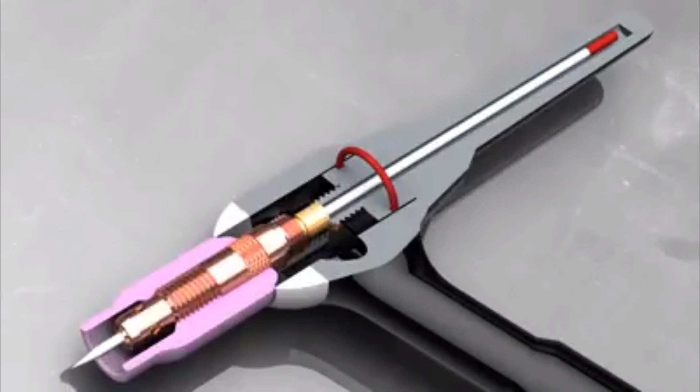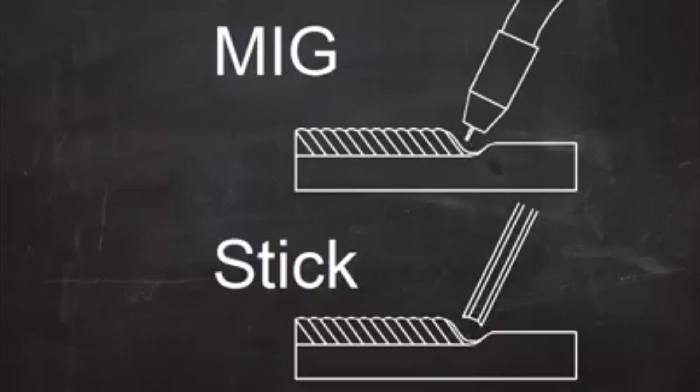This is a tungsten electrode, and tungsten has an extremely high melting point. When you TIG weld, the electrode gets hot, but it doesn't melt. We say that it's a non-consumable electrode. That doesn't mean it lasts forever. That just means that it doesn't melt and become part of the weld. You see, in a lot of other welding processes, the electrode melts and becomes filler metal. Those are consumable electrode processes.

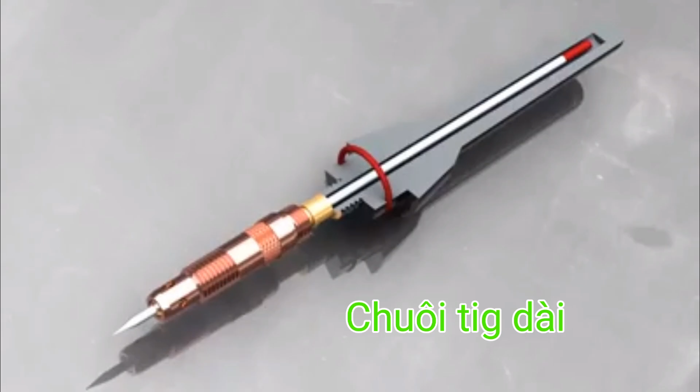So here's the tungsten electrode being held in a TIG torch. The electrode slips into a collet, and the collet tightens up against the collet body. You can adjust the length that the electrode sticks out of the holder by loosening up the end cap. When you tighten the end cap, the collet clamps down on the electrode.

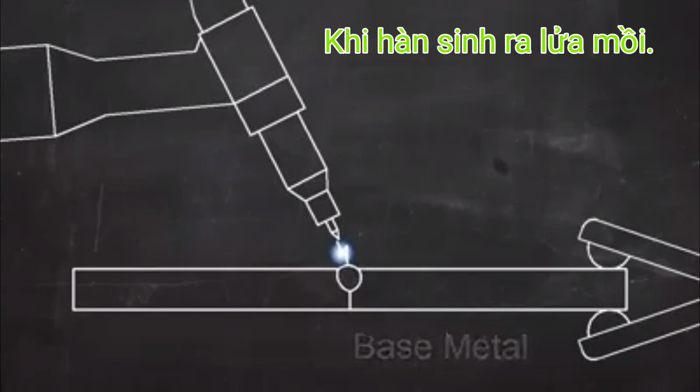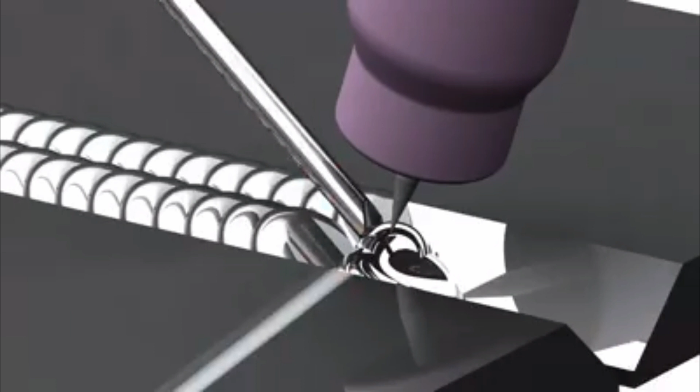TIG works by melting the base metal, and that is the metal that makes up the two pieces that are to be joined. The heat is generated by an electric arc that forms between the base metal and the tungsten electrode. You can control the amount of heat with a foot pedal, and weld with or without filler metal, and that's not a choice you have in a lot of other processes.

If you want to add filler metal to a TIG weld, use a filler rod, which is just a rod of metal with a specific alloy. You want to make sure that the filler metal you're using is compatible with the base metal and that it has the strength required to do the job.

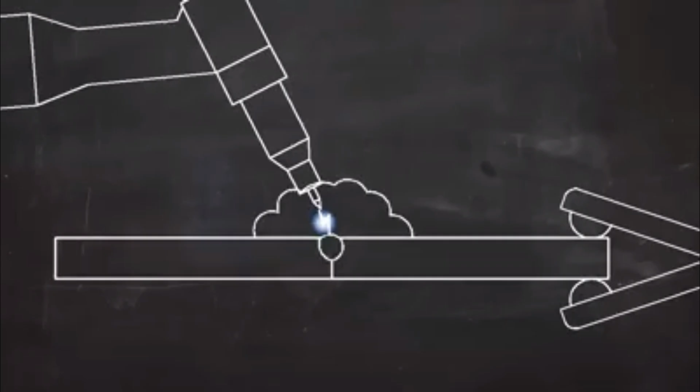In TIG welding, the molten metal is protected by a shielding gas. This gas, usually argon and sometimes helium or other gases, keeps the molten metal from reacting with oxygen and water vapor in the atmosphere. This shielding gas is stored in high-pressure cylinders like these. The pressure is reduced to a usable level by a device called a regulator. The shielding gas flows through a hose and comes out right at the point of the weld.

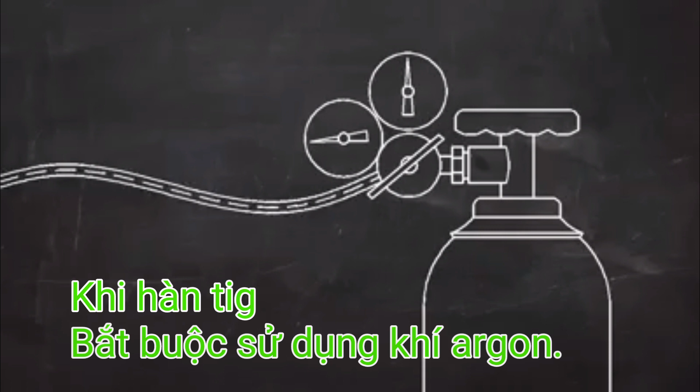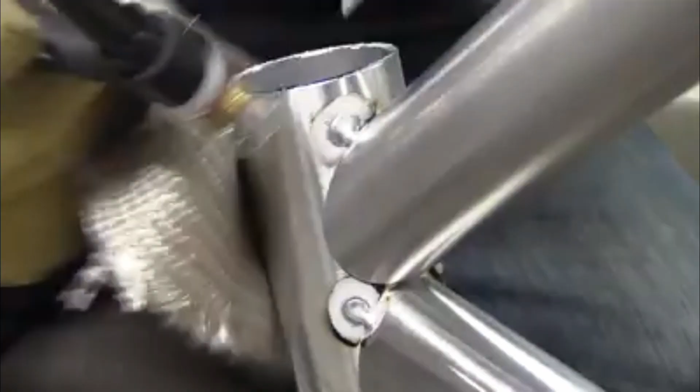All right, pay attention to something right here. It's subtle, but I'm going to call attention to it. Mike pulses with the foot pedal, and the reason for that is constantly having to rotate the torch to keep a decent torch angle. And so while he lets off, that gives him a second to reposition, rotate his wrist, get a favorable angle. That way the torch is never leaning back too far.

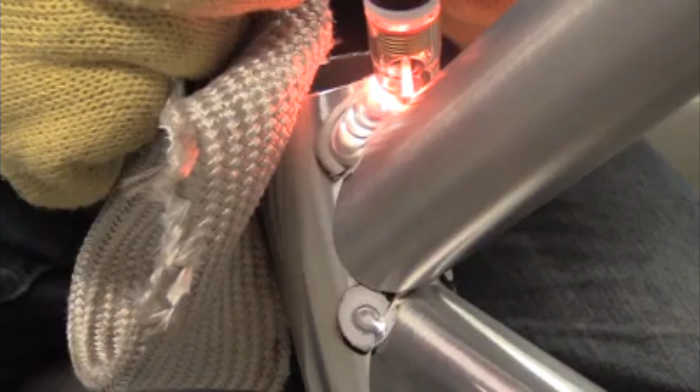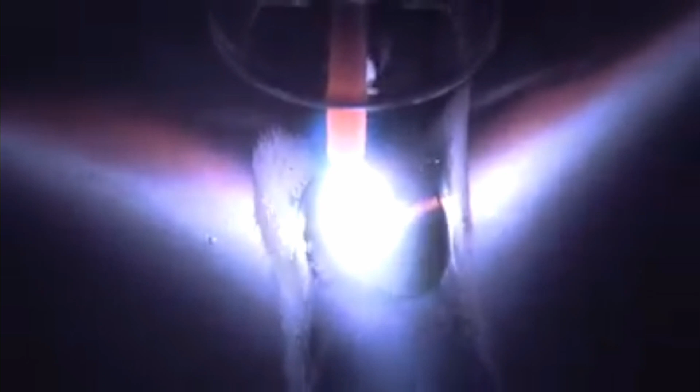So it's positioned in a fixture for welding after it's all tack welded up in the lineup fixture. So this is a mock-up right here, just positioned in that fixture. We're not going to weld the whole bike, just the head tube here. I think that's what it's called. Just the pulsing with the pedal here a little bit if you pay attention. There'll be plenty of arc shots coming up, and we will go over the exact settings used at the end of the video, where we sit down and talk about all those kind of things.

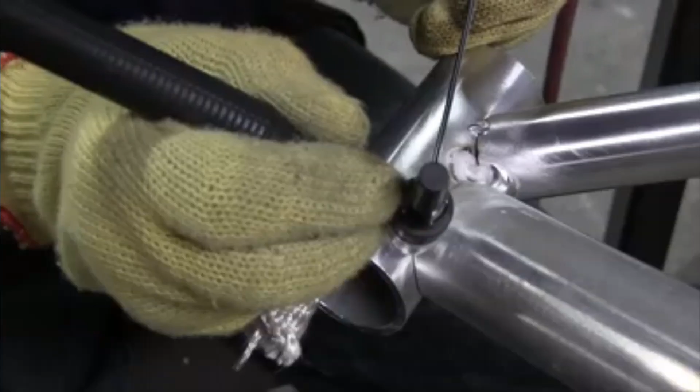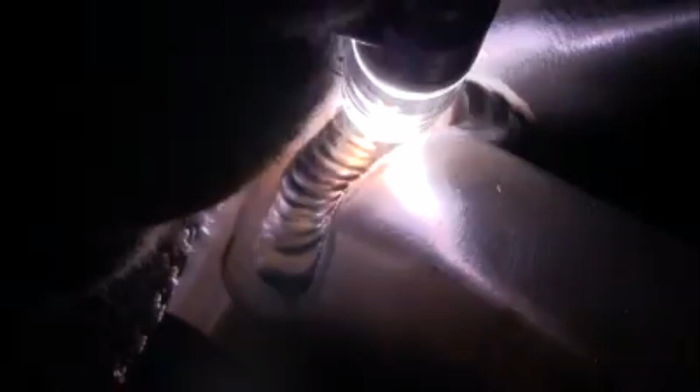Using a number 8 Furick Pro here, mainly two reasons. Number one, it's a really good cup. It helps you see where you're going, but also it's really nice for filming. It really kind of lights the whole way, so you can not only just see the puddle, but we can see the seam. We can see a few ripples behind it and everything. But I wouldn't hesitate to use this particular cup for this application anyway, because it just works good.

Again, the pedal pulsing, he's not letting off a whole lot, just enough so that heat doesn't build up and get out of hand while he's repositioning the torch angle.

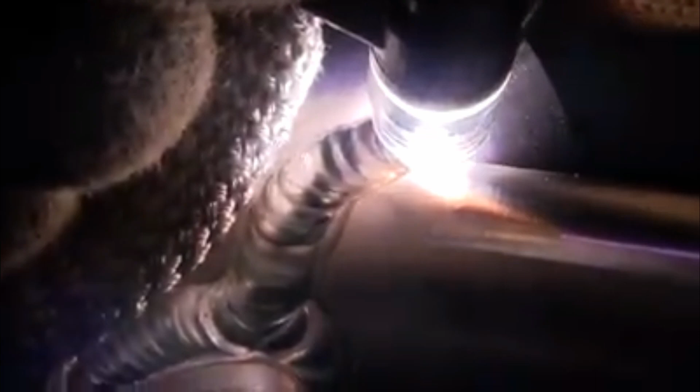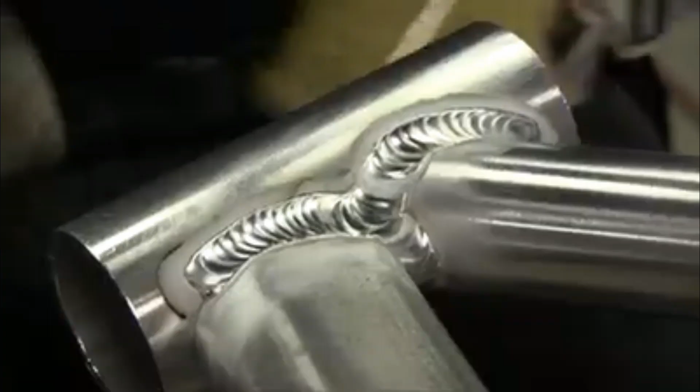A lot of guys in motorsports, and this is very similar to motorsports applications like roll cages and chassis and things like that, a lot of those guys pulse with the pedal, and the reason they do it with the pedal is because if they get hung up a little bit, if their glove hangs on something, or they just can't quite get positioned, that pulse isn't coming automatically. It only comes when they want it to come. So it's a very popular technique. I think it's a good technique for these type applications.

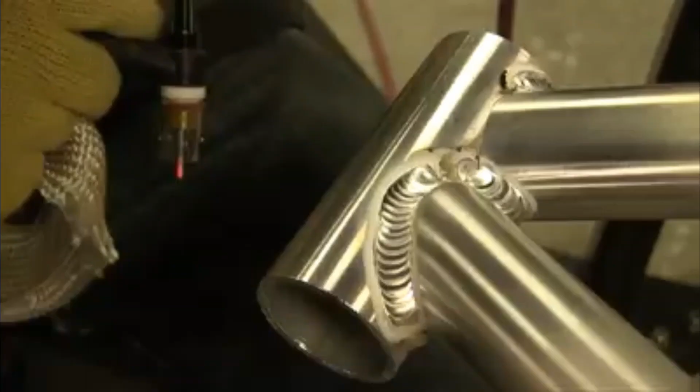Here's a good shot of it. You can see sometimes, when you get a bad angle, you can actually sort of look through the cup and see where you're going to feed wire. That's another benefit.

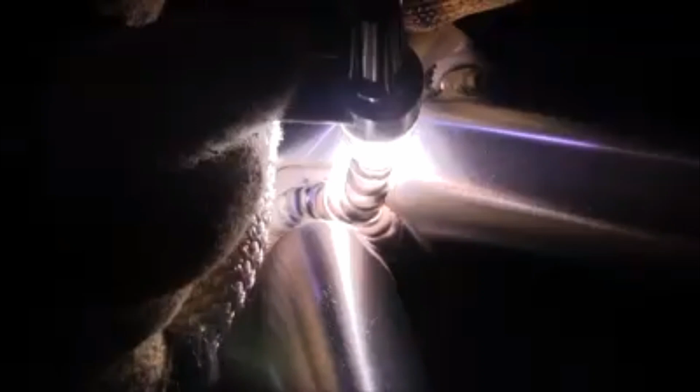Again, this is a mock-up here. This is not an entire frame, but if it was a frame, this would be going to paint after it was all cleaned up. So this little broad band of cleaning outside the bead, not an issue. Rather have that and have a nice clean puddle than narrow that band down for aesthetics. That's my opinion anyway, and Mike's too, I guess.

A little swirl as he adds another little dab of rod to avoid a crater crack as he tapers off the amperage. And so that joint is done now.